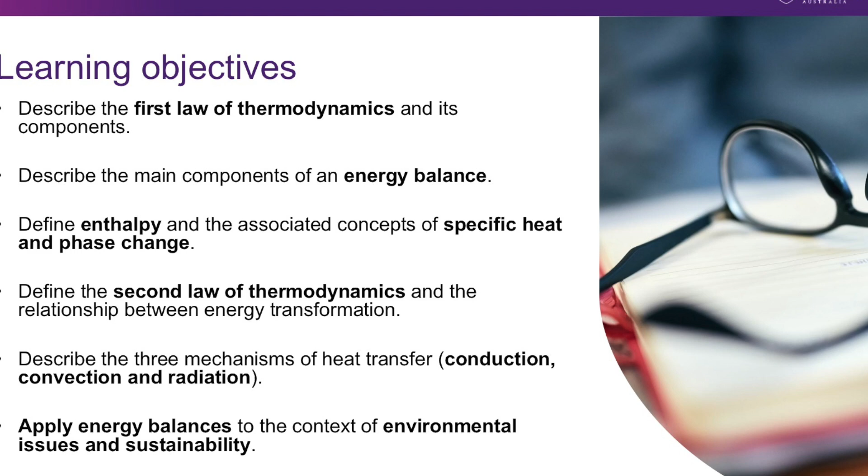Before we dive into the content, let's outline our learning objectives and discuss why this topic is crucial in the field. By the end of this lecture, you should be able to describe the first law of thermodynamics and its components, describe the main components of an energy balance, define enthalpy and the associated concepts of specific heat and phase change, define the second law of thermodynamics and the relationship between energy transformation, and describe the mechanisms of heat transfer.

All of these are embedded in some examples where you will apply energy balances to the context of environmental issues and sustainability. So understanding energy balance is fundamental to environmental engineering for several key reasons. Modern society depends on energy, and our daily lives and economic activities heavily rely on energy. So consider how the petroleum industry enables numerous aspects of modern living and the global economy.

In the area of energy transformations, for example, meeting society's energy needs involves complex transformations and control of energy flows. So as environmental engineers, we must understand these processes to manage them efficiently and minimize negative environmental impacts. Another important aspect of energy balance is the environmental consequences associated with energy. For example, energy production and use, especially from fossil fuels, significantly contribute to environmental problems. So did you know that the energy sector accounts for about 3/4 of global greenhouse gas emissions?

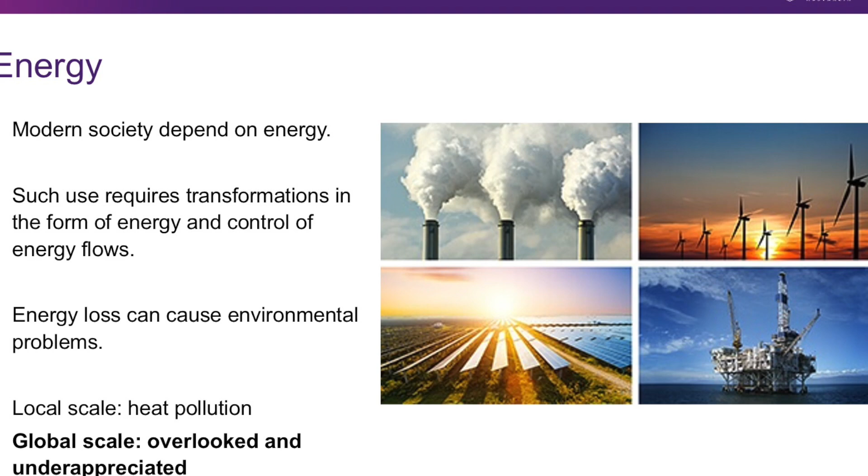The other issue that we have is more local. Energy loss and inefficiencies can lead to localized problems such as heat pollution, affecting local ecosystems and water bodies. And then we also have environmental impacts at global scale. For example, the overlooked and underappreciated climate change, ocean acidification, and sea level rise, which are enhanced by greenhouse gas emissions from the energy industry. Energy balances are also fundamental to controlling processing operations, particularly in managing product yields and reducing energy consumption in industries.

So during this lecture and the tutorial session, we're going to cover examples related to global warming because it is a thermodynamic problem, and it occurs, for example, due to alterations in the global energy balance, excessive use of energy due to inefficient energy conservation, greenhouse gas pollutants and changes in albedo, and excessive waste heat from human activities due to inefficient energy systems. So we're going to talk about, for example, the fossil fuel industry and how this is related to the waste of energy, and how the waste of energy is related to global warming.

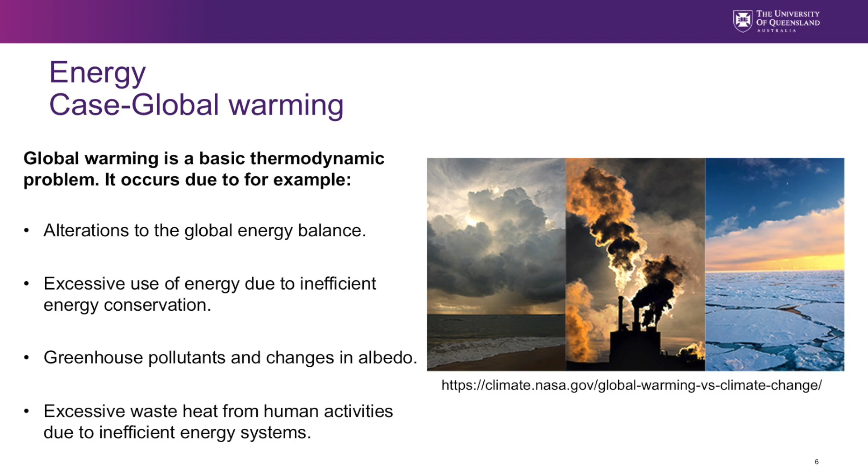Now let's start understanding the core concepts of energy balances that you may be familiar with from previous courses. And we're going to start with the first law of thermodynamics. The first law of thermodynamics states that energy can neither be created nor destroyed, only converted from one form to another. To apply the first law, we must define the system being studied by drawing an imaginary boundary around it. This system can be anything, from an engine, like in a car, to the earth itself. The area outside this boundary is called the surroundings.

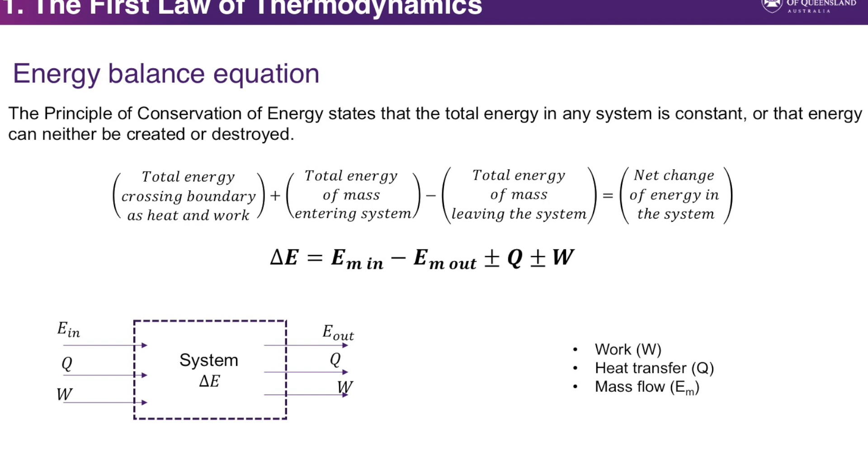Systems are classified as either open or closed, where open systems have flows of both energy and matter, and closed systems are systems where only energy can flow across the boundary, not matter. For any defined system, we can write an energy balance equation. And the general balance equation is energy in minus energy out plus energy generated minus energy consumed equals the change of energy of the system. In closed systems, the terms related to mass movement across the boundary are eliminated.

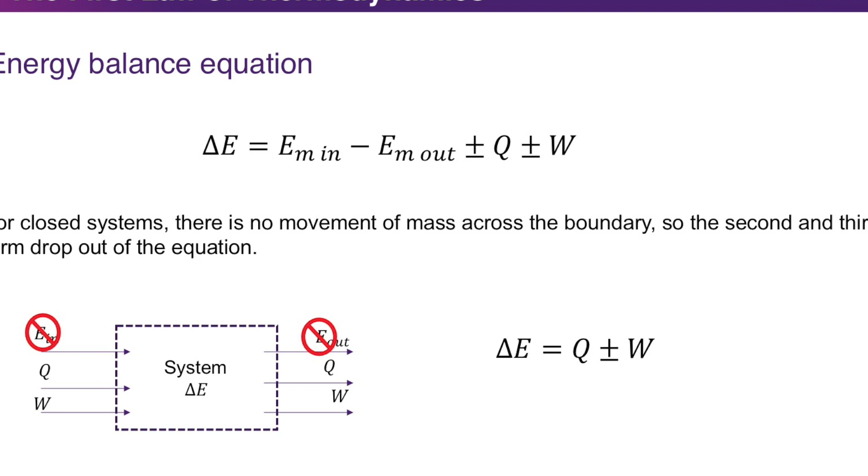The terms related to the energy generation or the energy consumption are related to work and heat transfer, where heat transfer can be done due to a change in temperature, and work can be done from an application of force from the surroundings that we will explain later. As you can see, the terms Q and W can have a positive sign or a negative sign, and this will depend on if it's being applied into the system or it's being taken from the system.

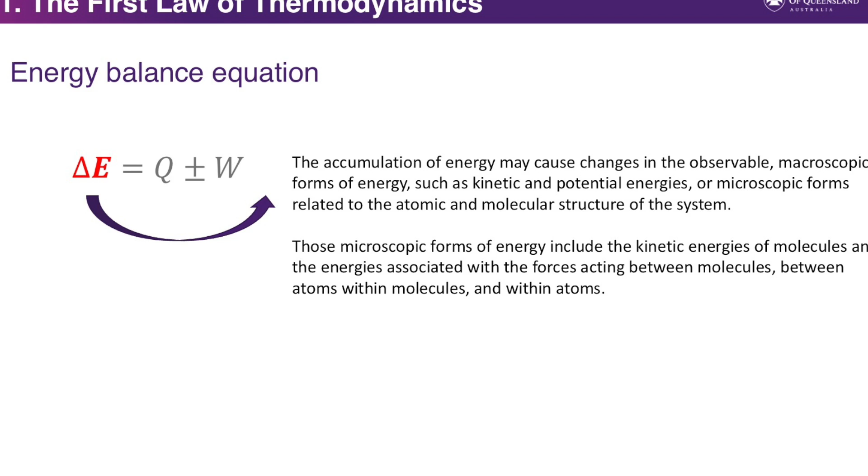Now let's take a closer look at the internal energy or the accumulation of energy that may be due to microscopic and macroscopic changes. The total energy of a substance can be described as the sum of its internal energy, U, the kinetic energy, KE, and potential energy, PE.

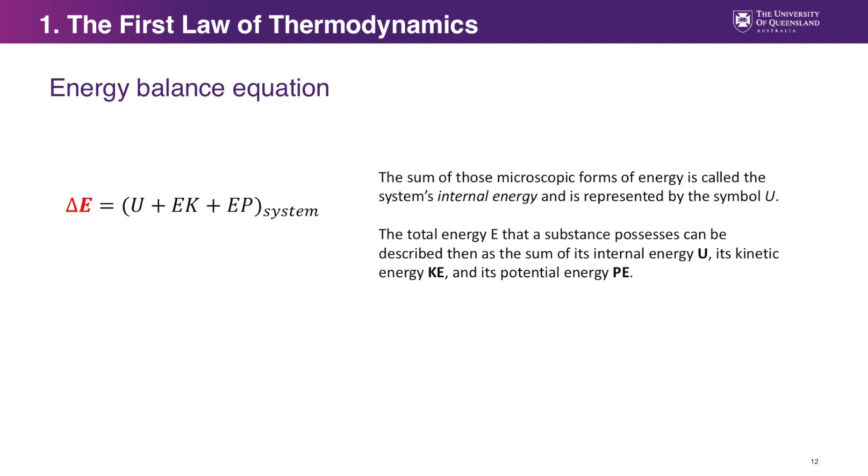This equation helps us to account for all forms of energy in a system, including the microscopic forms related to molecular structure and macroscopic forms, like the observable kinetic and potential energies. In many applications of our energy balance equation, the net energy added to a system will cause an increase in temperature. For instance, wastewater from a coal-fired plant will increase the temperature of a river where it is discharged.

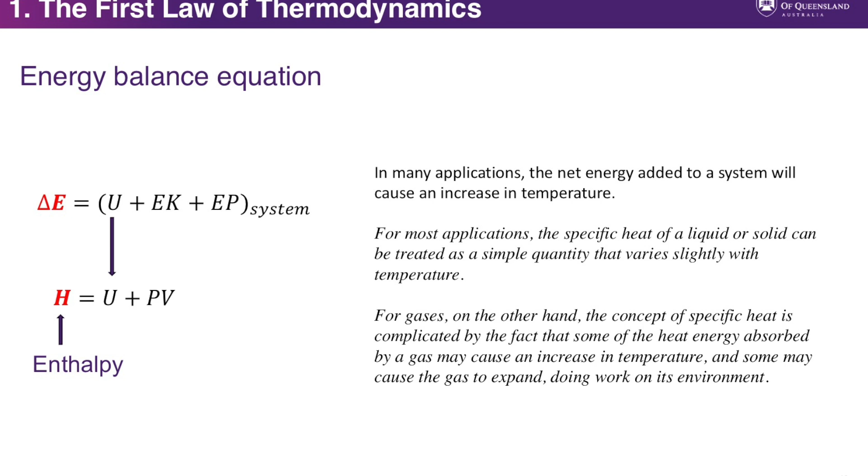The amount of energy needed to raise the temperature of a unit mass of a substance by 1 degree is called the specific heat, and we're going to discuss this more in detail on the following slides. This concept is crucial in understanding how different materials respond to energy inputs. But for most applications, the specific heat of a liquid or solid can be treated as a simple quantity that varies slightly with temperature.

So we have, however, two cases. We're going to divide the ones that have an effect only on the temperature, and the others that are related, for example, to gases, where there is going to be a change in volume. To handle systems that change pressure and volume, we introduce another thermodynamic property called enthalpy. The enthalpy of a substance is defined as H equals internal energy plus the product of pressure and volume.

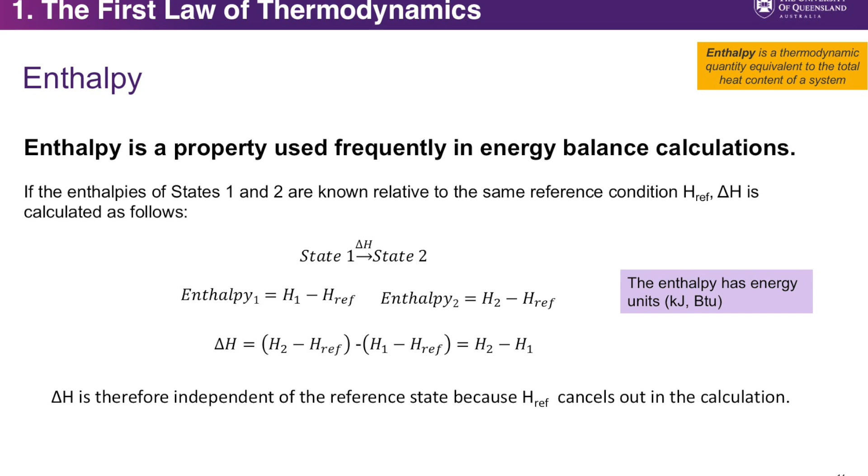Enthalpy of a unit mass of a substance will depend on its temperature and has energy units. Enthalpy is a state function, meaning that it depends only on the current state of the system, temperature, pressure, and composition, and not on how the system arrived at that state. So generally, we will use delta H instead of only H. We use it because we are not using absolute values. We're using the change related to a reference value.

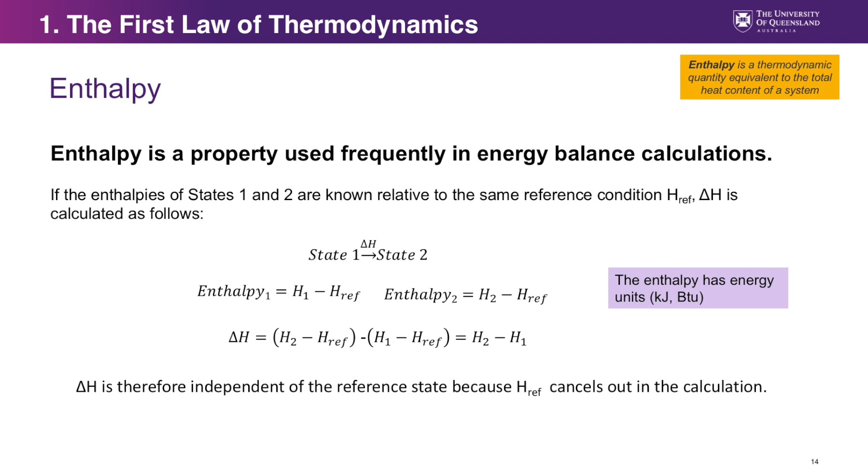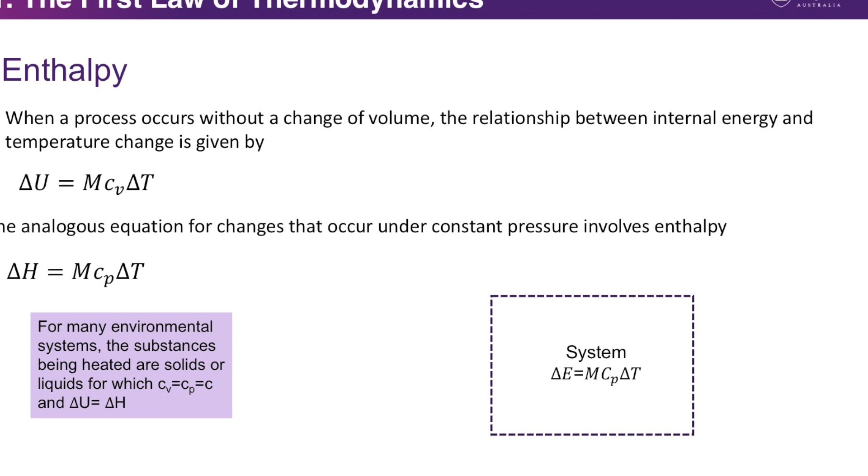We define it in this form, and then we will have an equation that will have a description of the change of internal energy. For many environmental systems, the substances heated are solids or liquids, and then we can have no distinction between heat capacity at constant volume or heat capacity at constant pressure. So we can write the general form as m c delta T, okay?

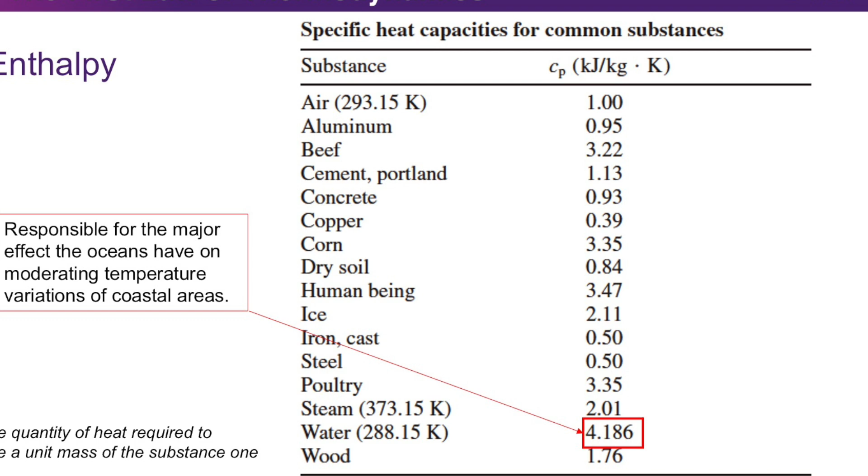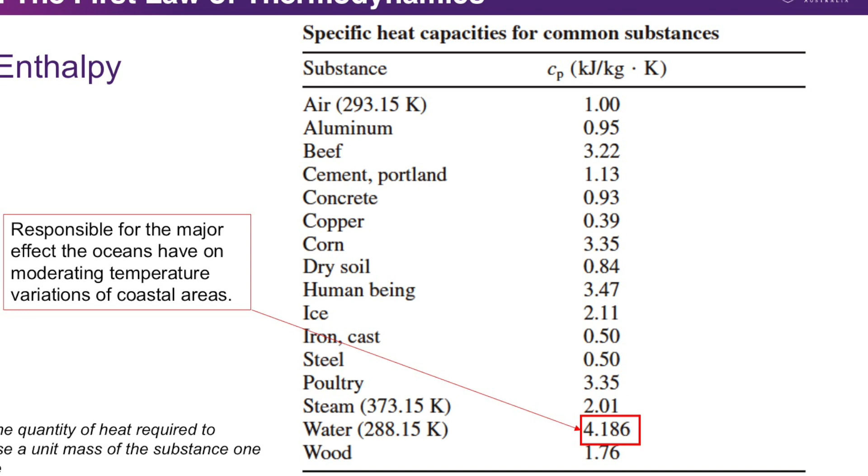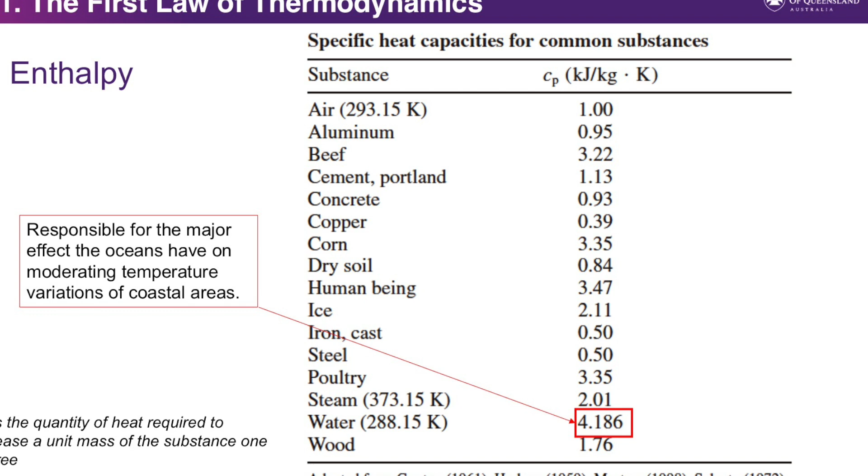So the specific heat capacities of common substances can be found in tables, and here I'm showing you the specific heat capacities of common substances such as air, steel, water, etc. And then you can observe something that is very interesting. The specific heat capacity of water is much higher than other substances. And now you can understand more the capacity of the oceans to absorb energy, and also the temperature variations in, for example, coastal areas. And this is also key to understand climate change and how the overall temperature of the planet is regulated due to this property, right?

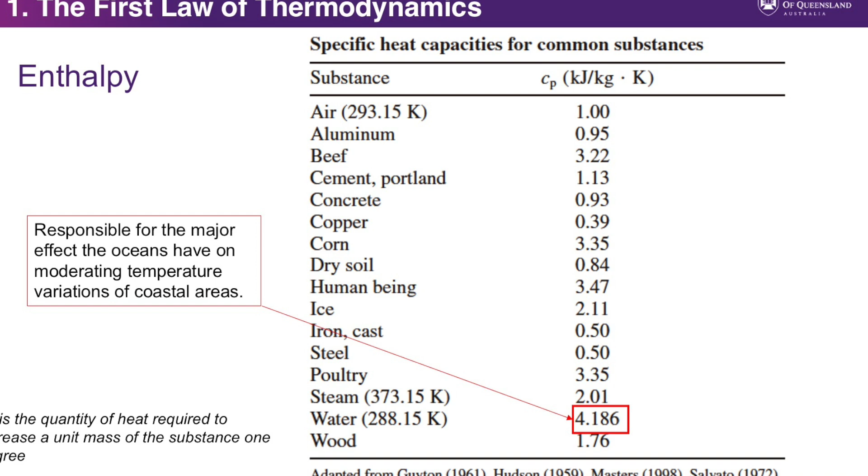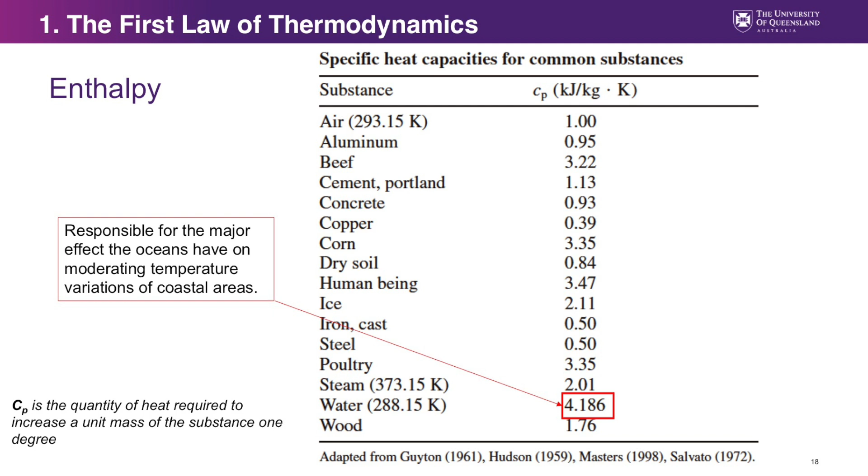But on the other hand, we can also see the heat capacity of other materials that is very, very low. So you can observe the specific heat capacity of copper, and that is why metals in general are not useful materials for making houses, right, or homes, because they will not maintain or regulate the temperature, right? It's interesting also to see that we have a specific heat capacity for the human body, and also for materials that are commonly used in buildings, and also air and other materials, right?

So now we're going to discuss a specific case of the change of enthalpy, and that is what happens when there is a change of phase. And this is called latent heat. Examples that we can mention are when ice melts into water or water boils into steam. In these cases, energy is absorbed or released without any change in temperature.

So this is where latent heat comes into play, okay? The latent heat of fusion, or enthalpy of fusion, is the energy required to change one unit of mass from solid to liquid at constant pressure.

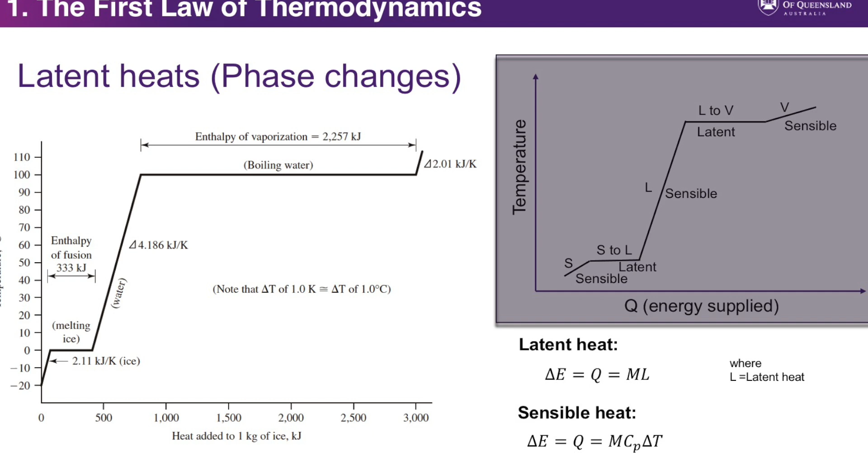So we have some numbers here. For example, to melt 1 kilogram of ice into water at 0 degrees Celsius, we need 333 kilojoules of energy. And to convert 1 kilogram of water at 100 degrees Celsius into steam, you need 2260 kilojoules of energy. So now there is something here very interesting.

When steam condenses back into water, or when water freezes into ice, those exact amounts of energy are released back into the environment. And we're going to have a very interesting example during the tutorial about the amount of energy that is required to evaporate the liquid water in the planet.

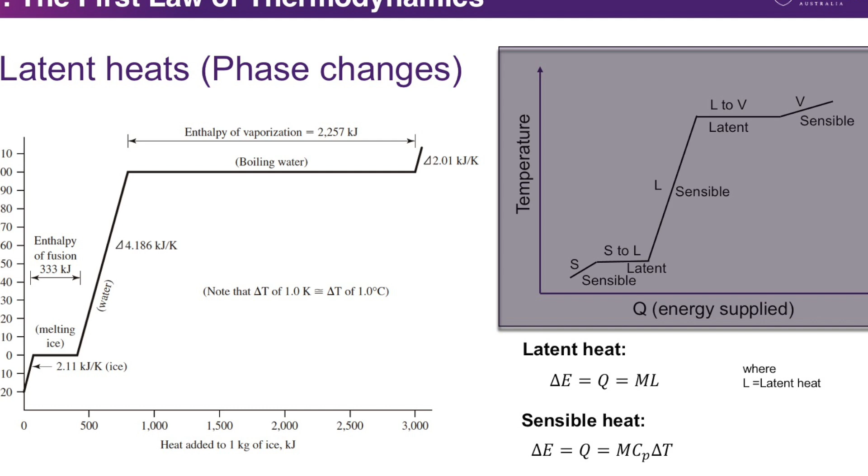Here I'm showing you in the bottom of the right figure the equation of the latent heat and the equation of the sensible heat. Latent heat is the energy absorbed or released by a substance during a phase change, as we discussed before, right? And it doesn't have a change in temperature.

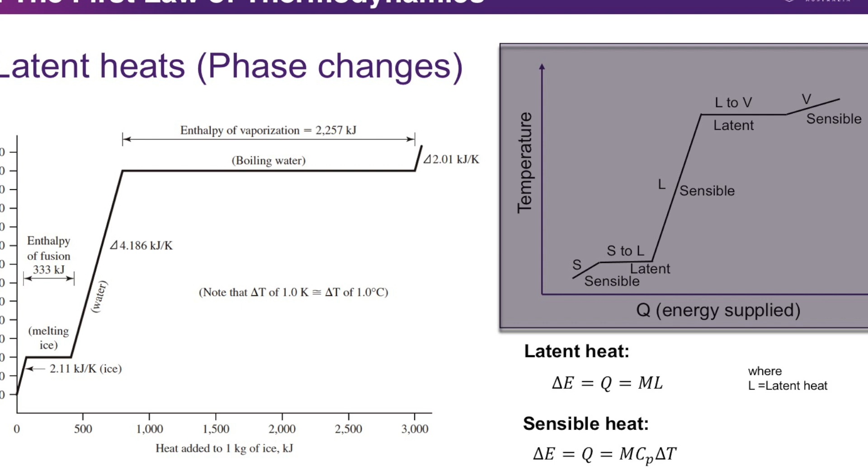The equation is Q equals mL, where L is the latent heat, and you can already predict the units because Q has energy units, for example, joules. This means that the latent heat should have units of joules per kilogram. So kilograms can be cancelled with the mass, right? m, as we said before, is the mass.

And the form of the equation where there is a change in temperature is the sensible heat. And then you can already distinguish the change in units, right? In the term of Cp, right? That should have energy divided by the mass and the temperature, right? So the temperature units can be cancelled.

So let's start our first example that is related to the Antarctic ice sheet. The Antarctic ice sheet is the largest single mass of ice on Earth. It has an average area of almost 14 million square kilometers and contains 26.5 million cubic kilometers of ice.

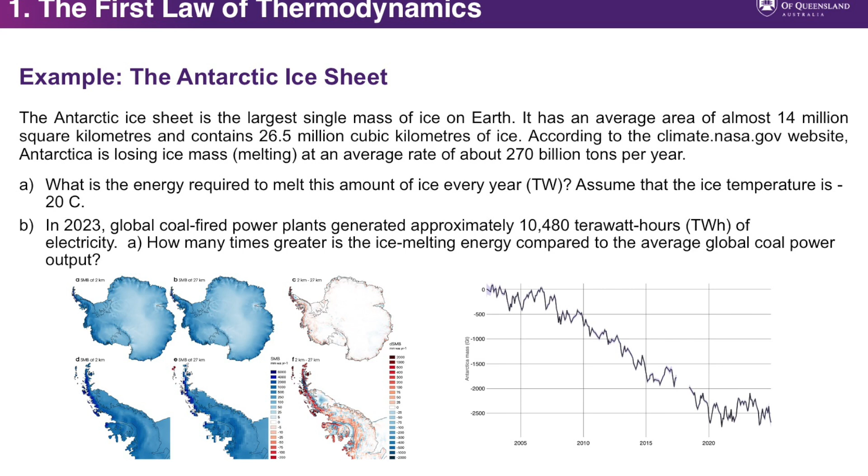So you know already that we need to calculate first the change of temperature because we need to have a change from minus 20 degrees to 0 degrees, right? And then at constant temperature, we will calculate the latent heat, okay?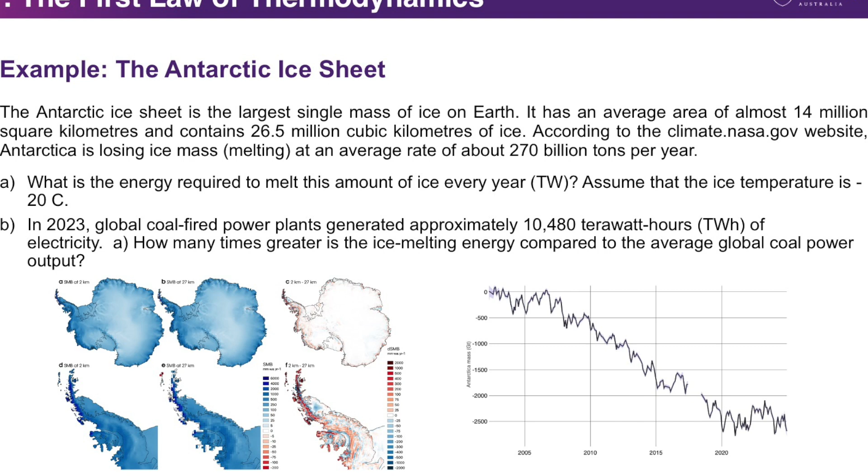So something that is going to be a little bit tricky in this problem is the change of units. In environmental phenomena, we use very big numbers in general, right? So we are using terawatts here. Watts, remember, has units of joules per second. So it's a flow of energy, all right?

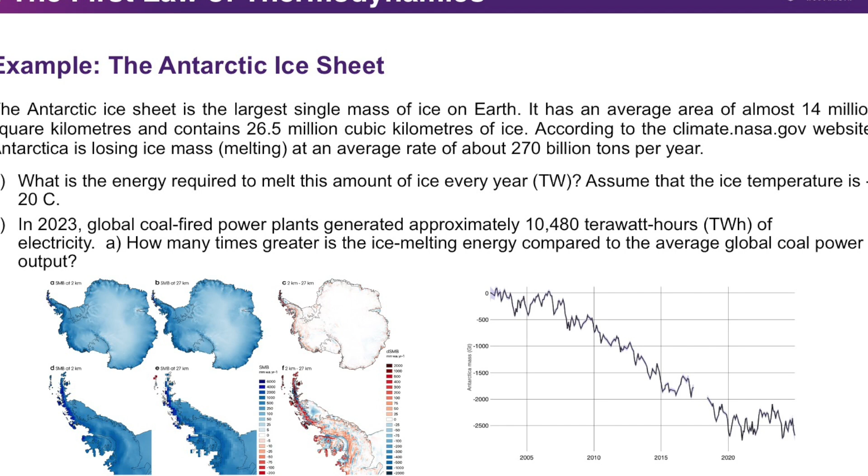And we will need to convert this flow of energy. We will need to transform this to terawatt hours. Well, from terawatt hours to average terawatts, okay?

And to put it into perspective, it is very important to have a reference, right? So we're going to compare this value that we obtain with the global energy produced by coal power plants, and so we can have a comparison of the amount of energy that has been required for melting these ice caps that probably in the future we will not have anymore.

We're now going to discuss the second law of thermodynamics, and this is an important concept in environmental engineering. So let's break it down step by step, and just keep in mind that we're just targeting the general concepts of energy balances applied for environmental engineering, and we're not going into details that can be discussed in a thermodynamics lecture, for example.

First, what is the second law of thermodynamics? Well, simply, it deals with the direction of natural processes. Many processes in nature only happen in one direction, and we call these irreversible processes. Some examples: drop a glass, it breaks, and the broken pieces don't come back together on their own. Or heat always moves from hot things to cold things, and never the other way around. This shows that some things in nature only happen one way. The second law of thermodynamics explains why.

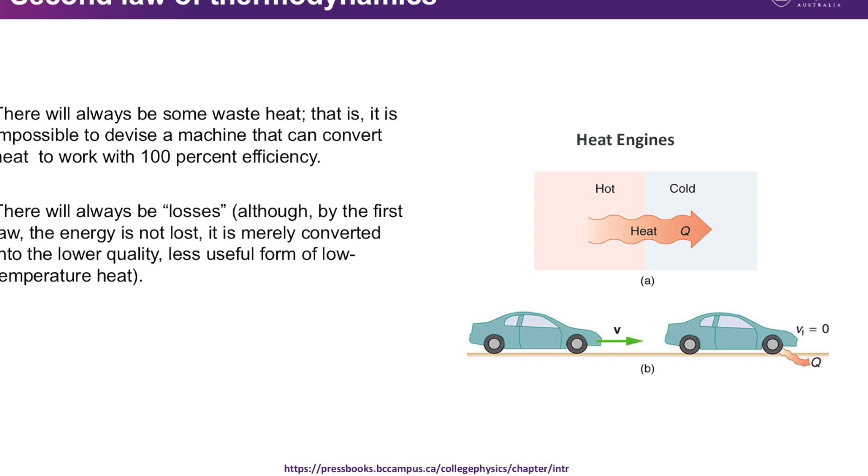So we're going to see the example of a machine that uses heat to do work, for example, car engines. They take heat from a hot place, use some of it to do work, and release the rest to a cold place. Here's an important point: no heat engine can turn all the heat it receives into work. So there are no 100% efficient machines. It means that some heat always gets lost to the surroundings.

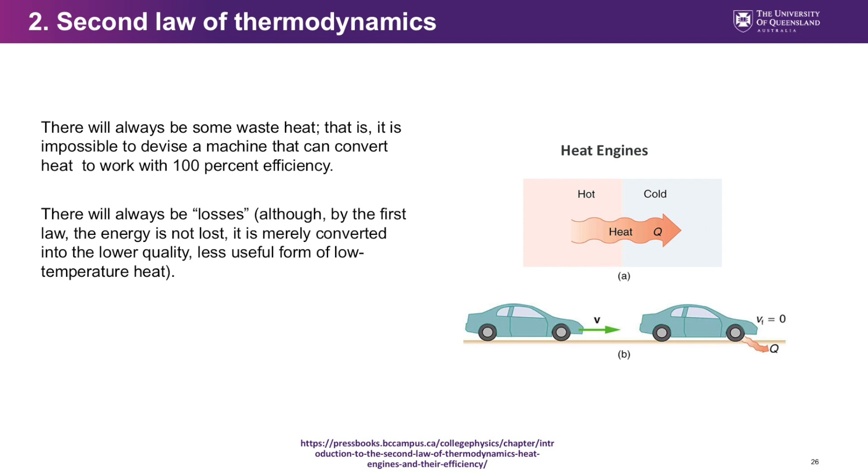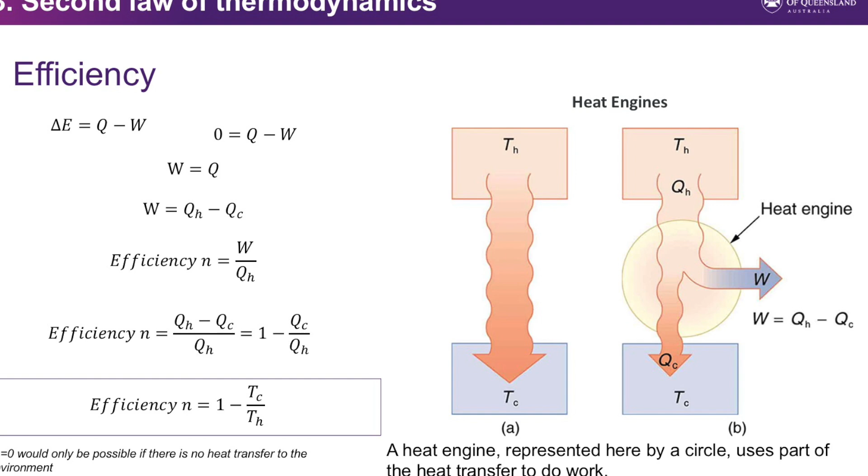Now let's look at the math behind it. The work done by the engine, W, equals the heat it takes in, QH, minus the heat it releases, QC. We can write this as an equation: W = QH - QC. Now let's talk about efficiency. Efficiency tells us how well the engine turns heat into work. We calculate it as work done over heat taken in, or in math terms, efficiency equals W divided by QH. We can also write it as (QH - QC) divided by QH, or 1 - QC/QH.

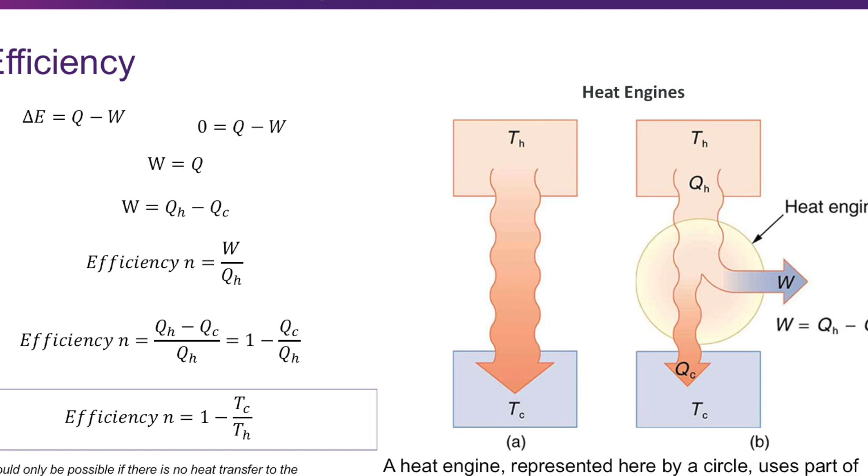We can also measure efficiency in terms of temperature, so η = 1 - Tc/Th. In the figure on the right side, I show you the representation of the heat transfer, where on the left side all the energy is lost to the environment, whereas in a heat engine, some of the energy is used for work.

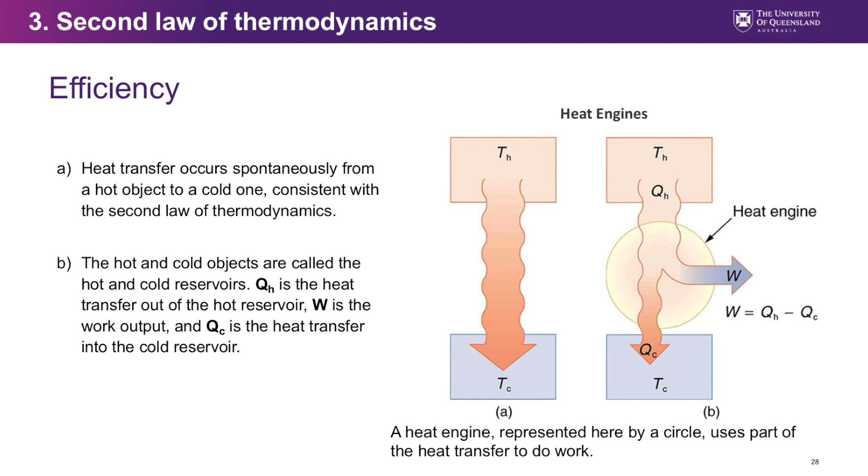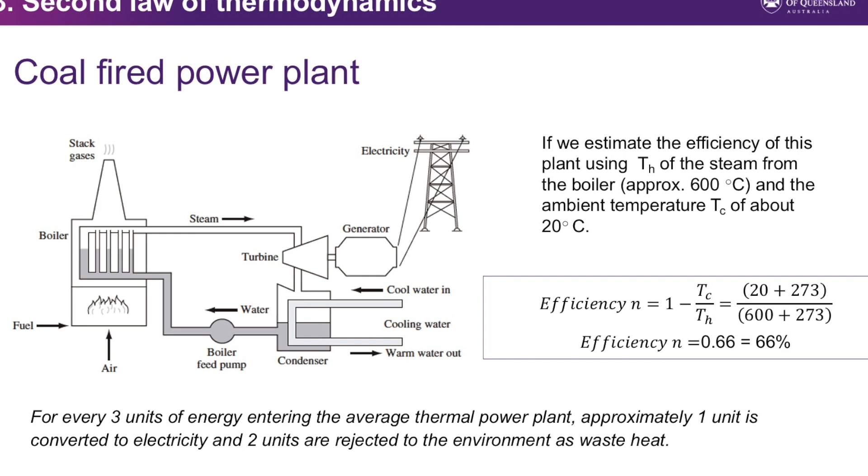All right. Understanding the second law of thermodynamics helps us to design better, more efficient systems, and this is crucial in environmental engineering. Because waste energy in systems will represent a bigger amount of fuel that needs to be added into the system, but it will also imply heat pollution, and heat that is lost is connected to carbon dioxide emissions when we're talking about fossil fuel energy, for example.

These simple equations can help us understand the efficiency of thermal power plants, for example, the one in this diagram. In this plant, fuel is burned in a fiery chamber surrounded by metal tubing. Water circulating through this boiler tubing is converted to high-pressure, high-temperature steam. During this conversion of chemical to thermal energy, losses on the order of 10% occur due to incomplete combustion and loss of heat up the smokestack. Later we can consider the air pollution associated with these plants, because this is one of the primary problems for global warming.

The steam produced in the boiler then enters a steam turbine. The high-pressure steam expands as it passes through the turbine blades, causing a shaft connected to the generator to spin. The turbine in the picture is shown as a single unit, but it is actually a series of turbines with many stages, with steam exiting one stage and entering another, gradually expanding and cooling as it goes. The generator converts the rotational energy of the spinning shaft into electrical power that goes out into transmission lines and distribution.

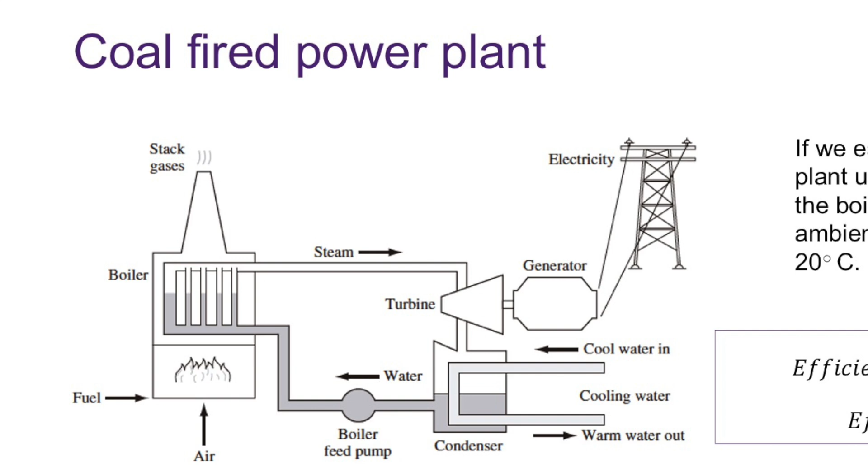So overall, throughout the passes of energy in all the system until the electricity lines, there is some loss of energy, the loss of energy that we have described before. In general, we know that for every 3 units of energy entering the average thermal power plant, approximately 1 unit is converted to electricity and 2 units are rejected to the environment as waste heat.

And it's interesting to see that it's still happening in these times. So improvements of efficiencies are very difficult to achieve. We can see this here on the right side, an example. If we state a reasonable temperature of steam that is around 600 degrees Celsius, and we know that the ambient temperature is about 20 degrees, we can estimate the efficiency, and it is about 66%, which correlates with what we were mentioning before.

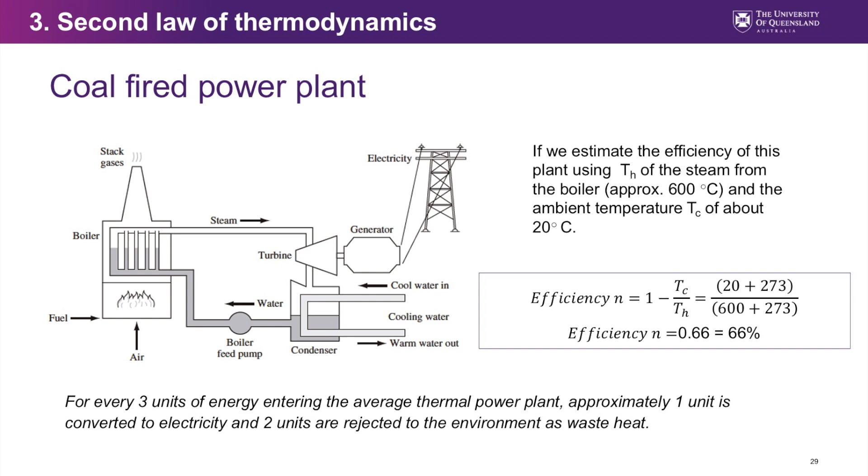Now let's look at the efficiency of coal-fired power plants in Australia. This is an important topic for environmental engineers here because a significant piece of energy that is being sourced in Australia comes from these plants. I have not provided specific efficiency values, but in general older plants have a lower efficiency as compared to newer plants, as we explained before. And the most efficient power plant is Tarong North, with 39% efficiency.

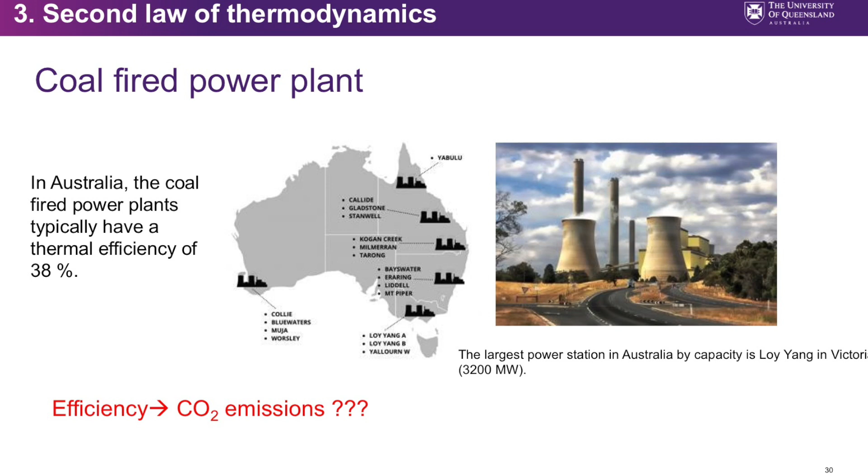Now, efficiency is important because it's connected to carbon dioxide emissions. So this is an important component of the emissions that occur in New South Wales and Victoria, because they have the concentration of power plants, and also Queensland. It is worth mentioning that the largest power station in Australia is Loy Yang in Victoria and has a capacity of 3,200 megawatts.

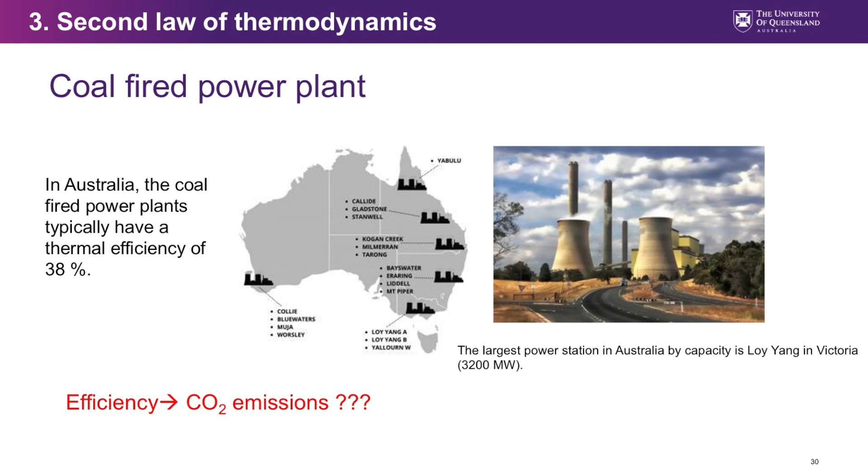We're going to use this power plant as an example for our next problem. We're going to use this energy capacity of the coal-fired power plant in Loy Yang, Victoria, to estimate the energy that is transferred to the environment, considering an efficiency of the plant of 38%. And we're also going to calculate how much CO2 is emitted to the atmosphere every year due only to the energy that is being wasted. This is very important because in many cases we talk about the offset of carbon dioxide emissions by only shutting down these sources of energy.

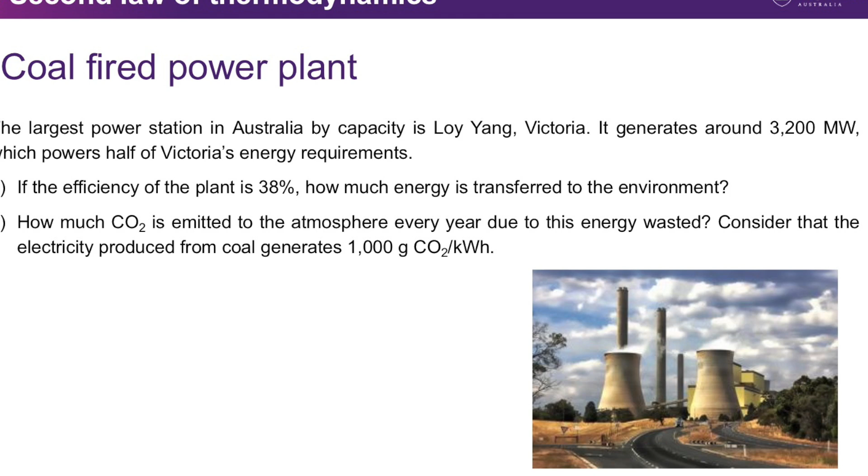That is almost impossible in many cases because we have communities and cities that depend on this energy. But by improving the efficiency, we could already reduce some greenhouse gas emissions associated with these power plants.

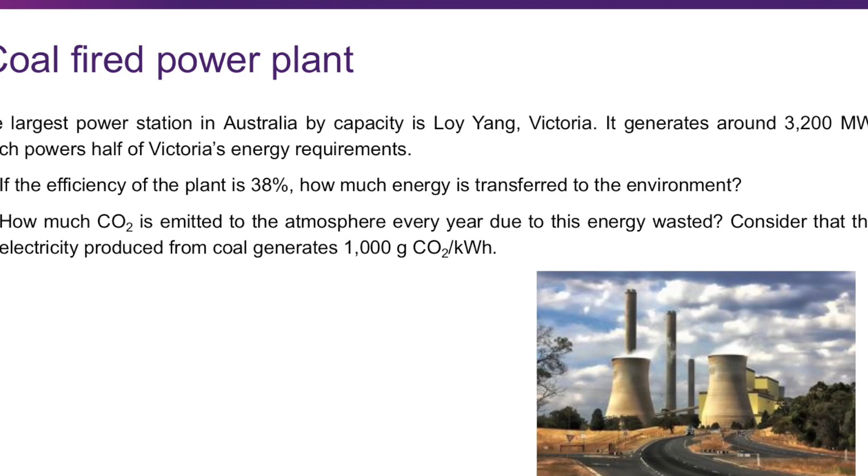We're going to start discussing the last topic of energy balances, which is heat transfer, that can occur due to conduction, convection and radiation. Some examples that we are going to discuss in this section are energy crossing boundaries, which is highly important to understand insulation in houses and the sustainable built environment, and also solar radiation to heat, which is an important component for understanding the temperature of the earth.

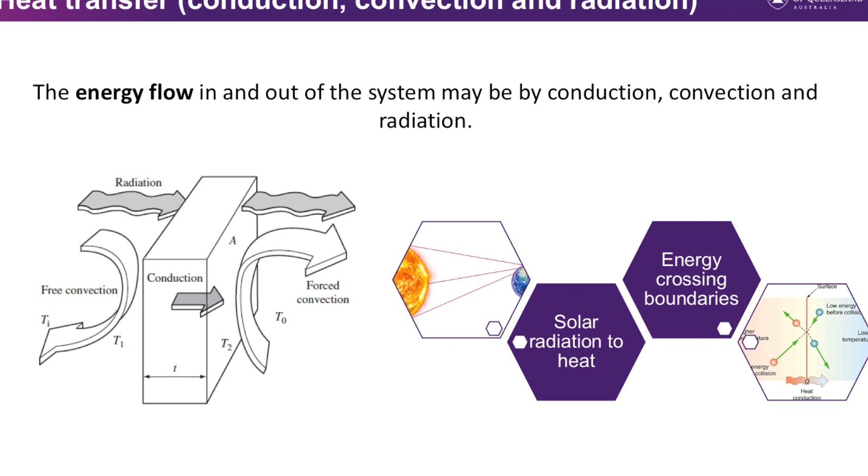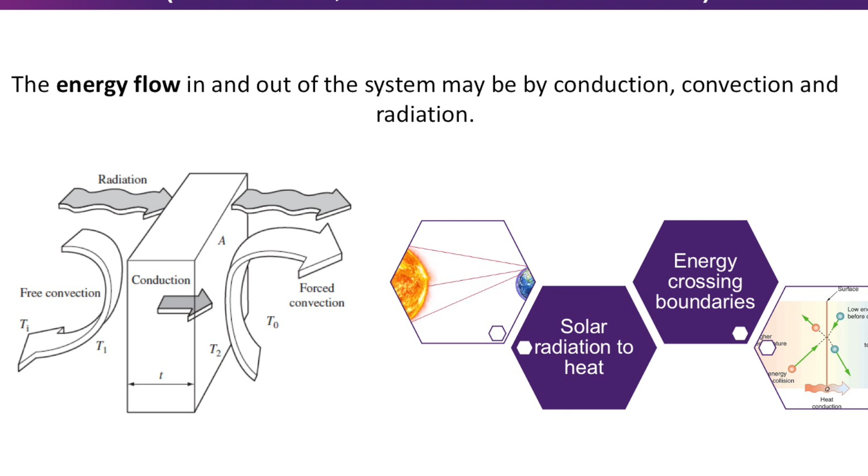So when two objects are at different temperatures, the heat is transferred from the hotter object to the colder object. This is something that we already discussed before. The heat transfer can be by conduction or convection, or by radiation, which can take place even in the absence of any physical medium between the objects.

So the heat transfer, as incorporated into the energy balance, will be the change of the energy from one system to the other, divided by a material, and each region of the system on one side or the other can also be calculated, because it's an enthalpy. It's a loss of enthalpy of the hot body and a gain of enthalpy of the cold body. All right. So this is something we can keep in mind, because we can also estimate the internal energy of these systems that are joined or divided by some material.

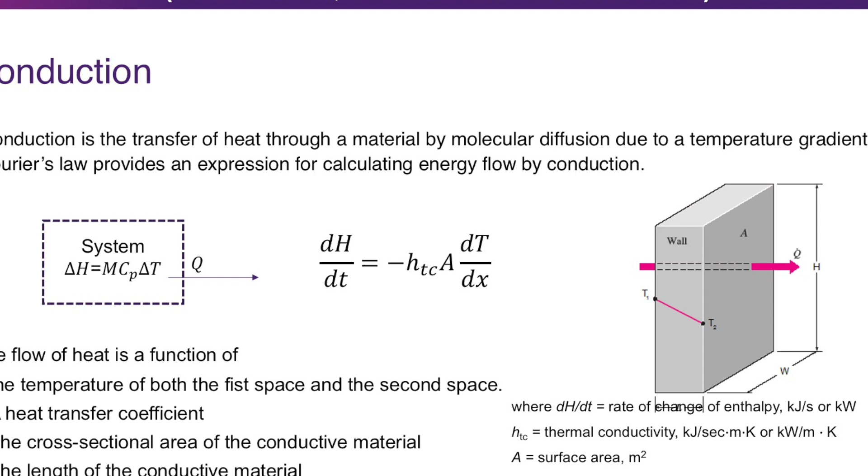So as I explained to you, conduction occurs by a gradient, and this is defined by Fourier's law, which provides an expression for calculating energy flow by conduction. So the flow of heat is a function of the temperature of both the first space and the second space, a heat transfer coefficient, the cross-sectional area of the conductive material, and the length of the conductive material. And here you can see a figure where every component is explained.

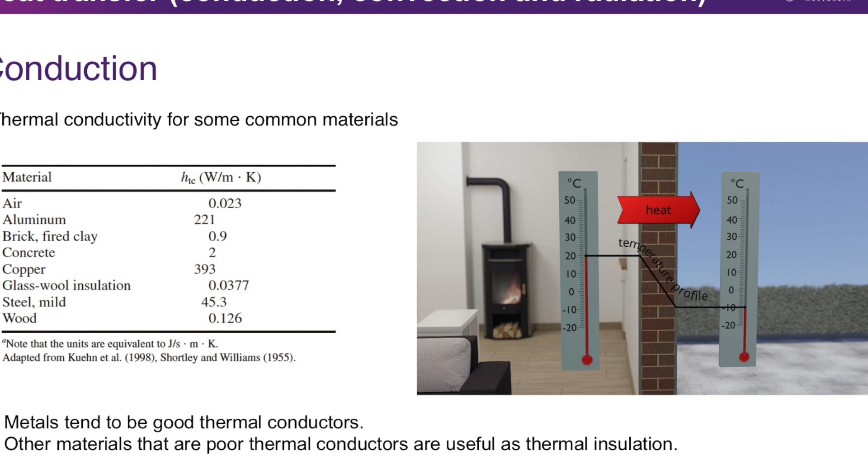So the thermal conductivity is particular for each material, as we saw for the specific heat capacity, and it can be described in units of watts per meter per Kelvin, or per unit of temperature. We can also have it as kilojoules per second per meter per unit of temperature, which in this case is Kelvin.

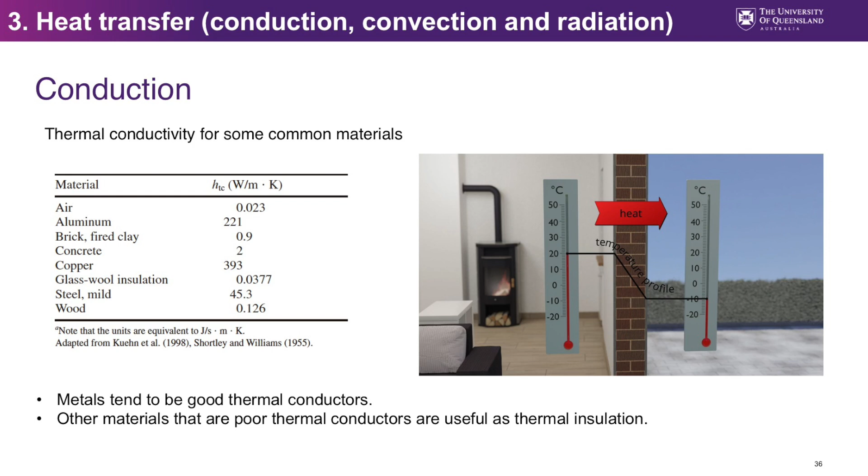You can see again the clear difference in thermal conductivity among materials, right? We can observe that there are materials that have a high conductivity, and that is why they're used to transfer or conduct energy. For example, copper, and to a lesser extent, aluminum. And there are some other materials that are less prone to conduct energy. So in general, metals tend to be good thermal conductors, while materials that are poor thermal conductors are useful for thermal insulation.

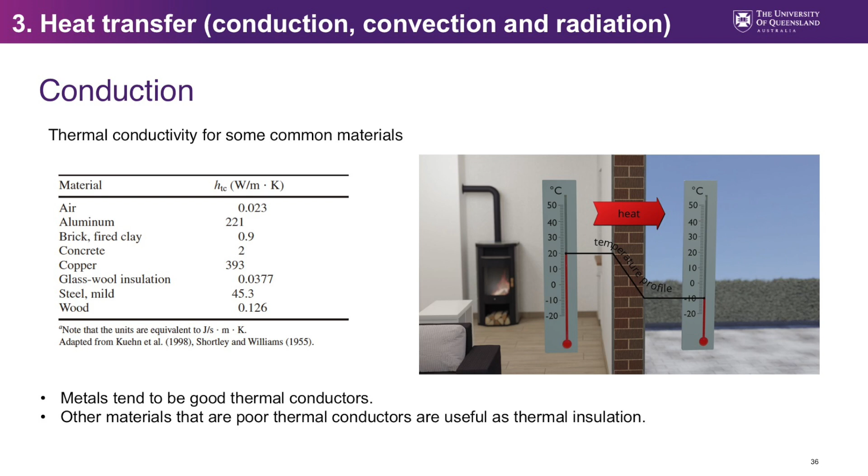We can also have a similar form of transfer of energy, that is convection. The difference is that in convection there is a force that allows the transfer of the heat. So there's going to be a large scale fluid motion; examples include a flowing river or aquifer, or the wind blowing. So we need some forces that will allow the transfer of the energy.

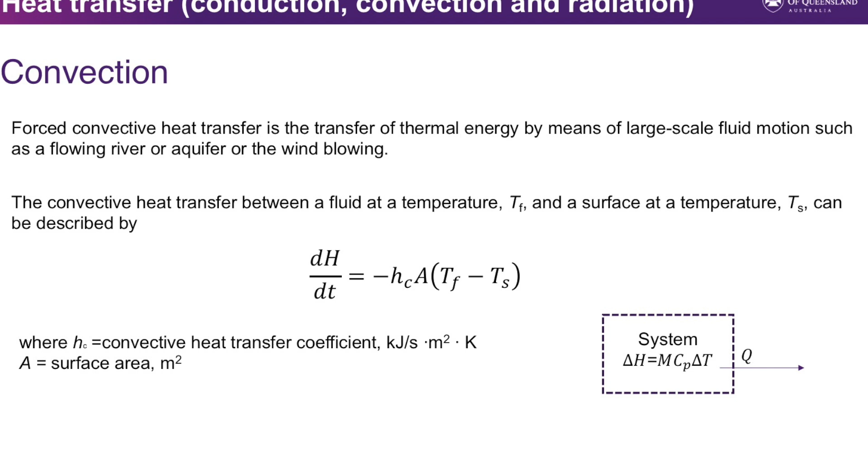So convective heat transfer also occurs from hotter to colder, and you can see that the equation is quite similar to the one for conduction. We will also have a coefficient called the convective heat transfer coefficient, and the main difference here is that the energy is in units of energy per second, but per square meter. So it means that the surface area is considered for the convection of the heat.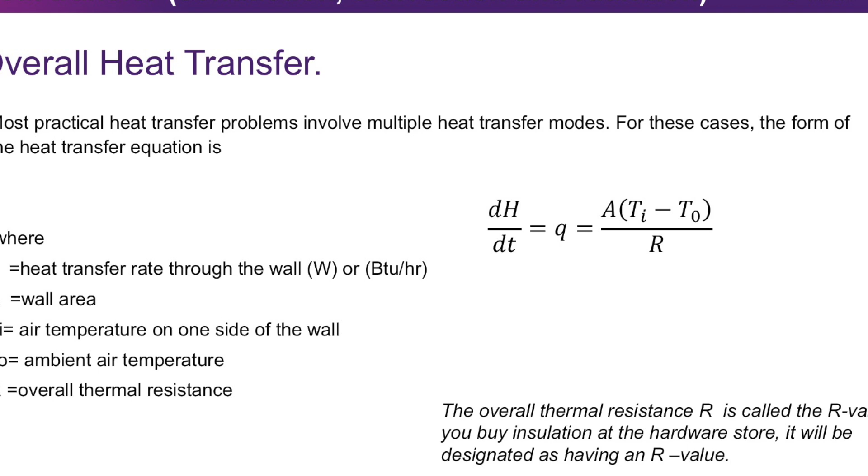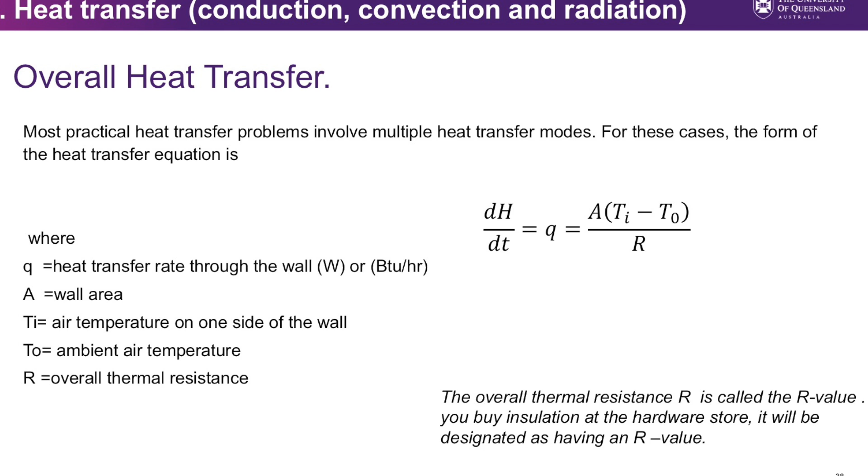So because convection and conduction can occur together and are highly interrelated, we better use an equation called overall heat transfer, and this is the best way to estimate heat transfer. And this is already used for estimating heat transfer in materials that you can buy for building houses, etc. So for these cases, the equation takes the following form, where the change of energy over time equals the heat transfer rate through the wall, Q, and this equals the wall area multiplied by the change in temperature, divided by the overall thermal resistance.

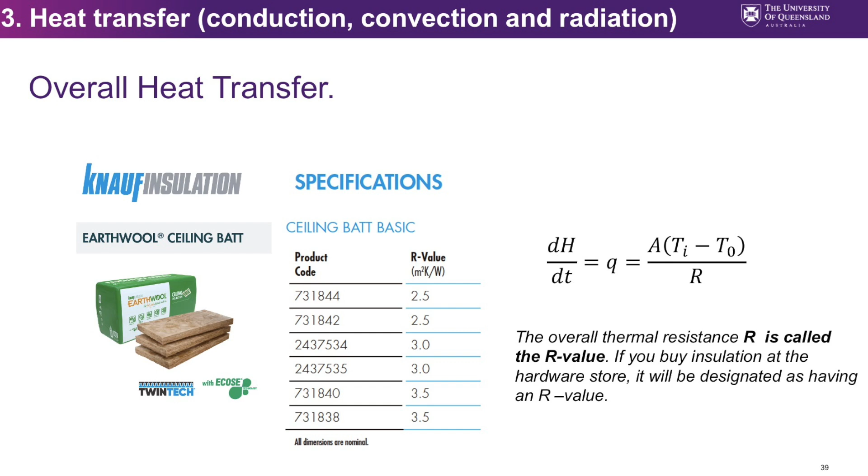The overall thermal resistance is called the R value, and when you buy insulation materials, they will provide you this R value. So generally you will see materials that are used for ceilings or for walls, and they will provide this R value, and you can estimate the rate of the heat transfer. So for the tutorial, we're gonna have an example where we estimate the transfer of heat either by conduction or convection or with the overall heat transfer.

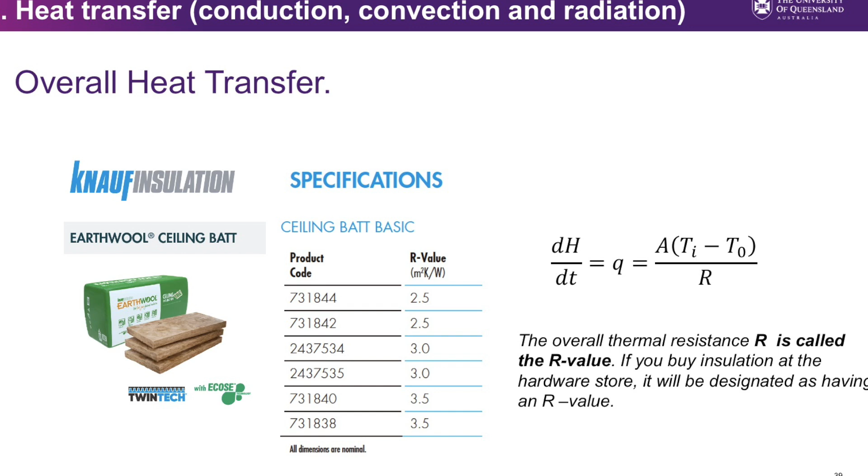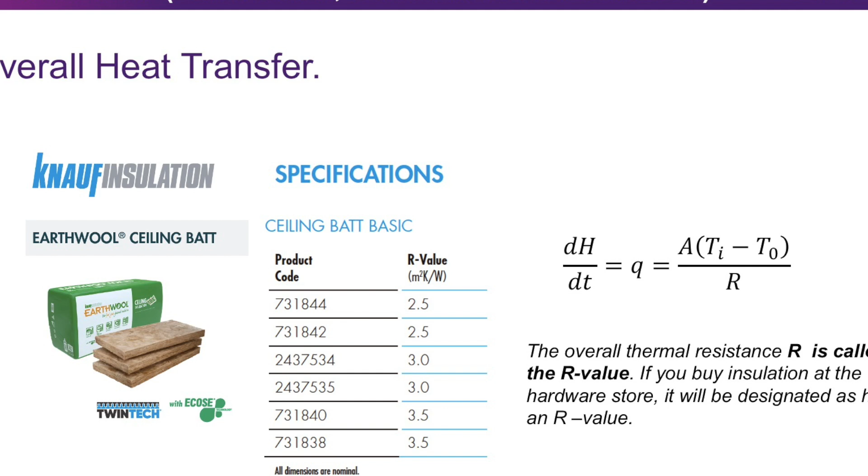Okay, so keep in mind that you have to read the problem clearly, and that is very important for you to define which equation to use, so don't get overwhelmed. I think it's important to look at the units. The units should make sense, because at the end you should have units of energy or units of energy over time, because this is like a rate. Okay, so that will determine which type of equation you need to use.

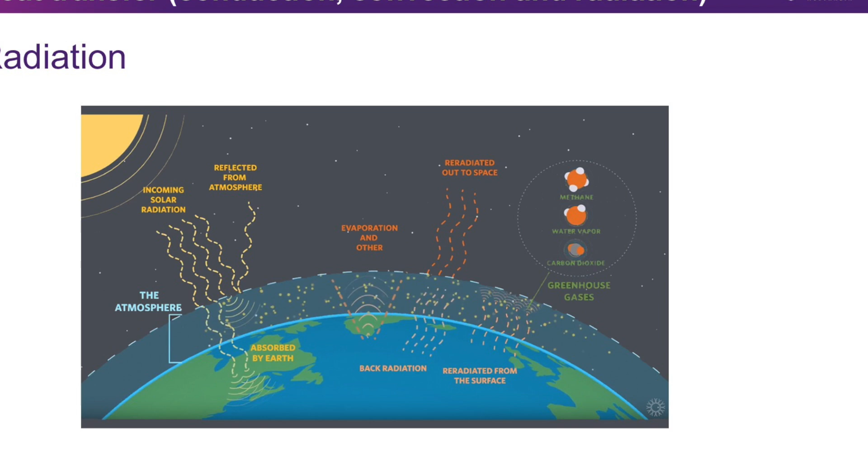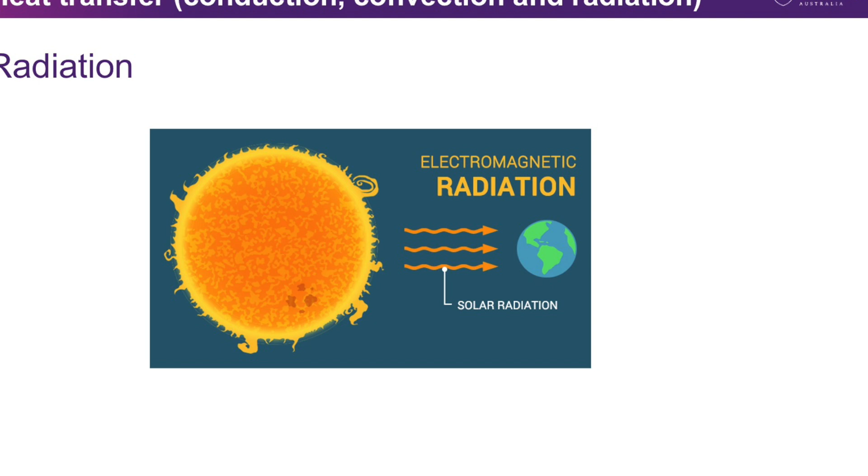Okay, we're going to start discussing radiation now. Heat transfer by thermal radiation is the third way that an object can warm another. And unlike conduction, radiant energy is transported by electromagnetic waves and does not require a medium to carry the energy. For example, these electromagnetic waves are the ones being transferred from the sun to the earth. And the earth itself also radiates some of the energy.

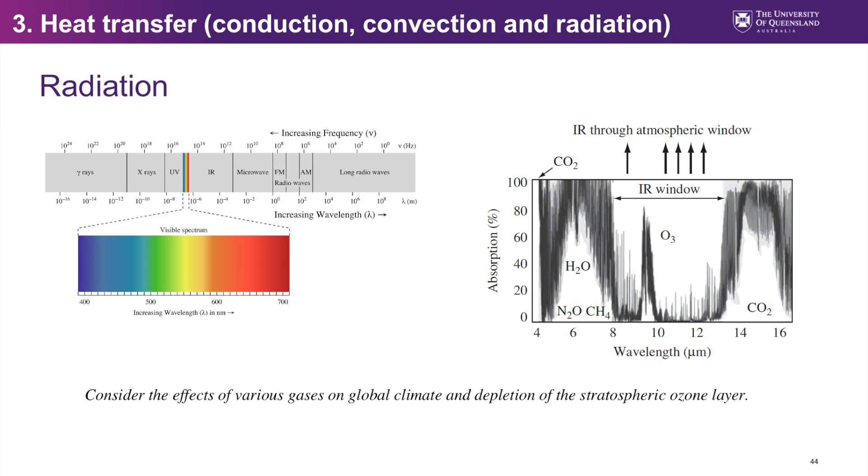So we can use as an example the various gases on climate change that are depleting the ozone layer. So we not only have gases that are affecting the greenhouse gas effect, but we also have some others that actually are depleting this ozone layer, right? And these ones are important in the range of 0.1 micrometers up to 100 micrometers. So we can see this in perspective if we look at the portion of the electromagnetic spectrum.

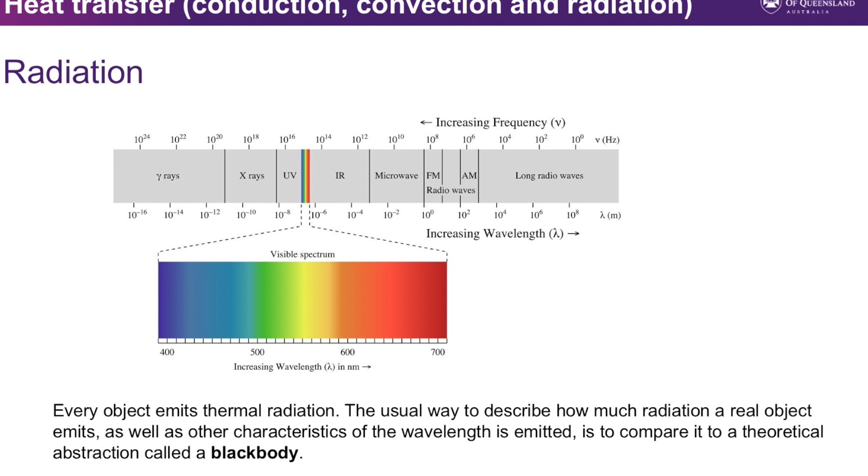Every object emits thermal radiation, and the usual way to describe it is to know how much radiation the object emits, and also the characteristic of the wavelength. When we have a description of the emission, we will always compare it to the theoretical abstraction called a black body. A black body is defined as a perfect emitter as well as a perfect absorber. A perfect emitter because it radiates more energy per unit of surface area than any real object at the same temperature. And as a perfect absorber, it means that it absorbs all radiation that impinges upon it, that is, nothing is reflected and none is transmitted through it.

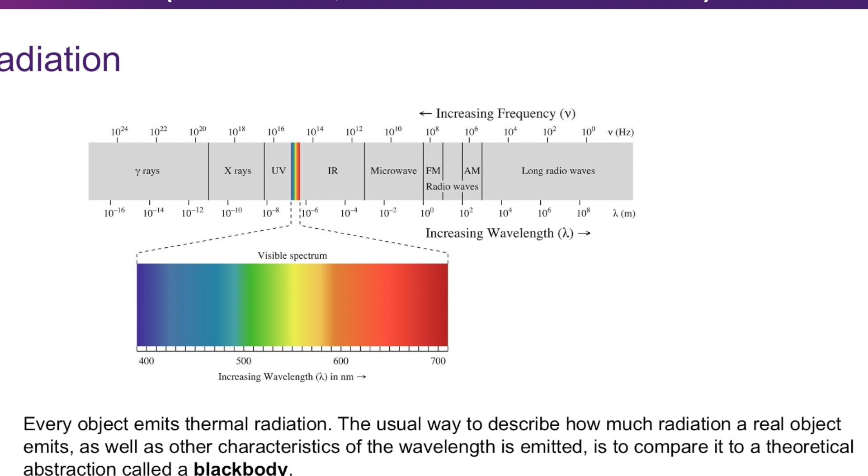You know that in reality, actual objects do not emit as much radiation as this black body hypothesis, but most of them are close to this theoretical black body. The ratio of the radiation an actual object emits to the amount that is emitted by the black body is called emissivity. And the emissivity will vary depending on the material. So desert sand can have an emissivity of around 0.9, whereas water can have an emissivity of 0.95. And as a reference, a human body, no matter the pigmentation, will have an emissivity of 0.96.

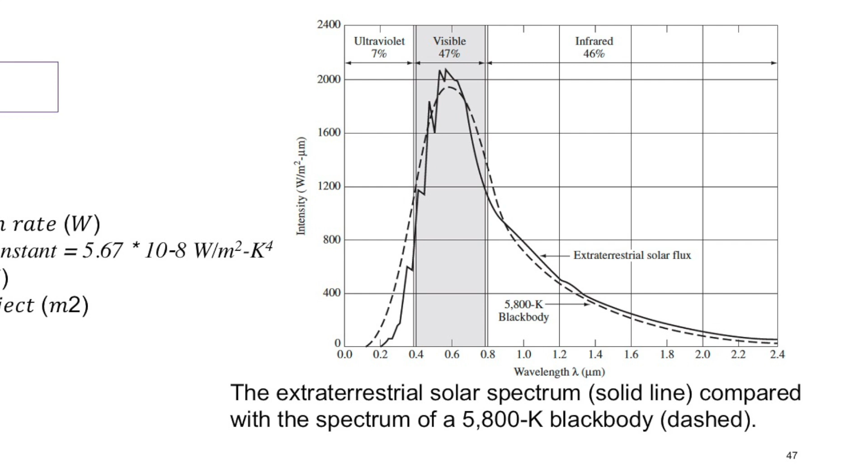But how can we interpret this diagram? Well, we can see the area below the curve, and this is equal to the power radiated by the object within the band of the wavelength. So in general, objects with higher temperatures emit more power, and as the figure suggests, their peak intensity occurs at shorter wavelengths. So extraterrestrial solar radiation just outside the Earth's atmosphere shows spectral characteristics that are well approximated by black body radiation. For the solar spectrum, the area under the curve between 0.38 and 0.78 micrometers is 47% of the total area.

The previous equation and some of the equations that I'm showing you for radiation are just for understanding how energy due to radiation is described. But for example, Planck's law is very difficult to manipulate, so that's why we have two other radiation equations that are more straightforward, and one of them is the Stefan-Boltzmann law of radiation, which gives us the radiant energy emitted by the black body with a surface area and absolute temperature. This equation is more manageable and can be used to determine the temperature of a body at the surface. And this is the one that we actually use for determination of the Earth's temperature.

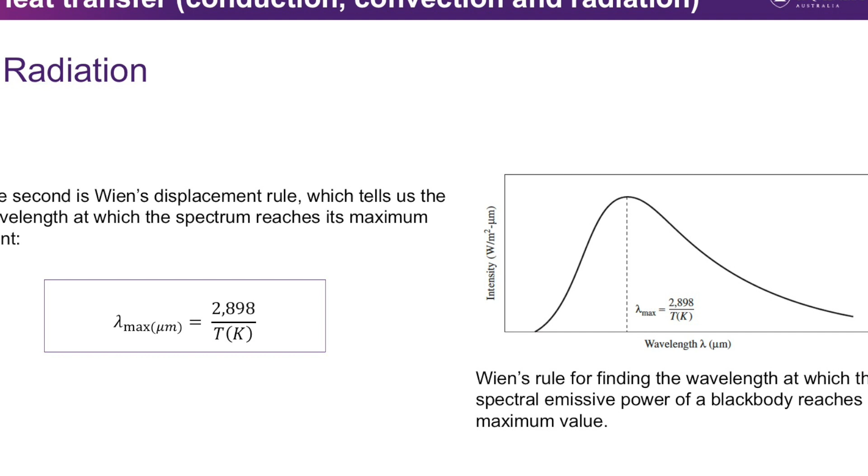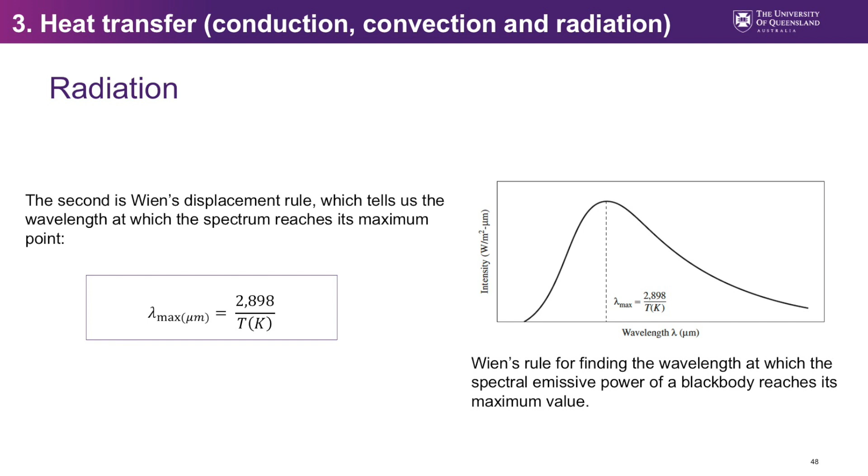The second equation that we can use is Wien's displacement rule. This one tells us the wavelength at which the spectrum reaches the maximum point, and is defined by a constant value divided by the temperature. So with this equation we can estimate, for instance, the Earth's spectrum.